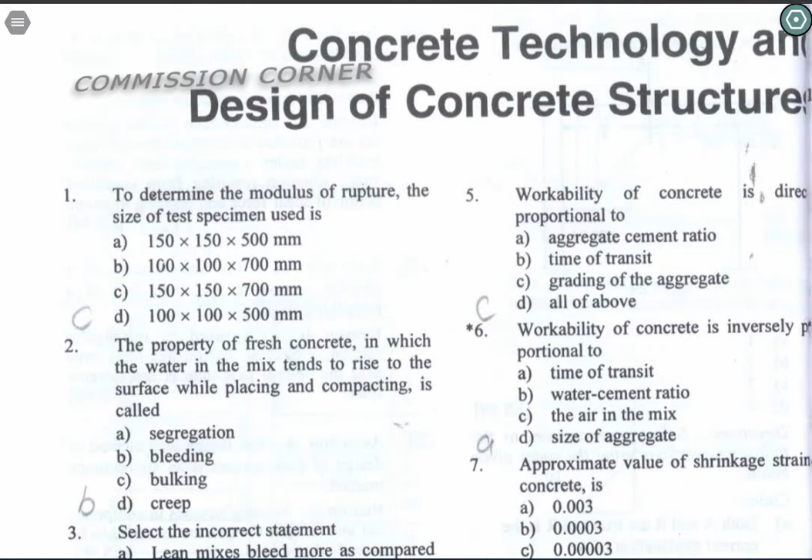Question number 3: Select the incorrect statement. Lean mixes bleed more as compared to rich ones - correct. Bleeding can be minimized by adding pozzolana finer aggregate - correct. Bleeding can be increased by addition of calcium chloride - correct. So all these options are correct, meaning option D, none of the above, is the answer.

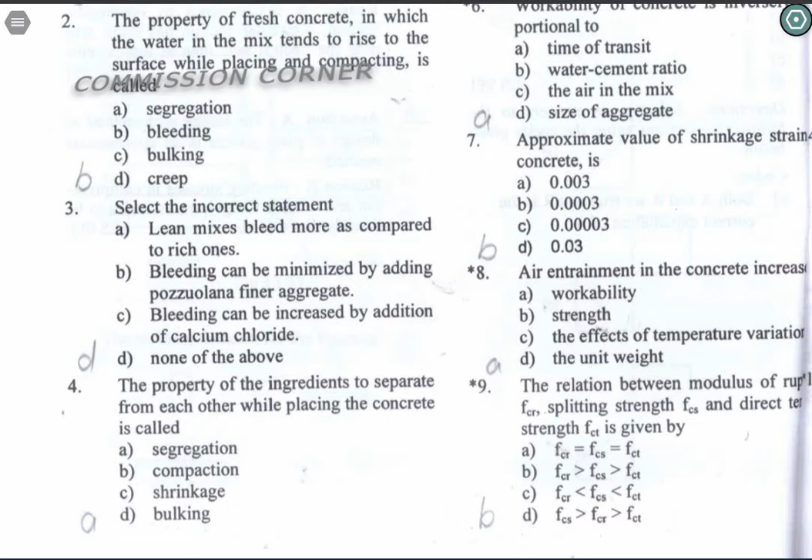Question number 4: The property of ingredients to separate from each other while placing the concrete is called segregation. Option number A is the correct answer for this.

Question number 5: Workability of concrete is directly proportional to the grading of aggregate. Option number C is the correct answer.

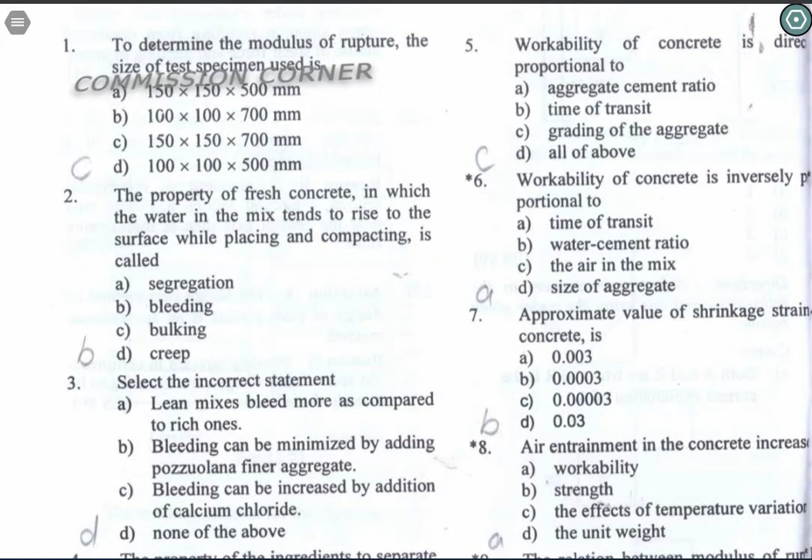Question number 6: Workability of concrete is inversely proportional to the time of transit. Option number A is the correct answer.

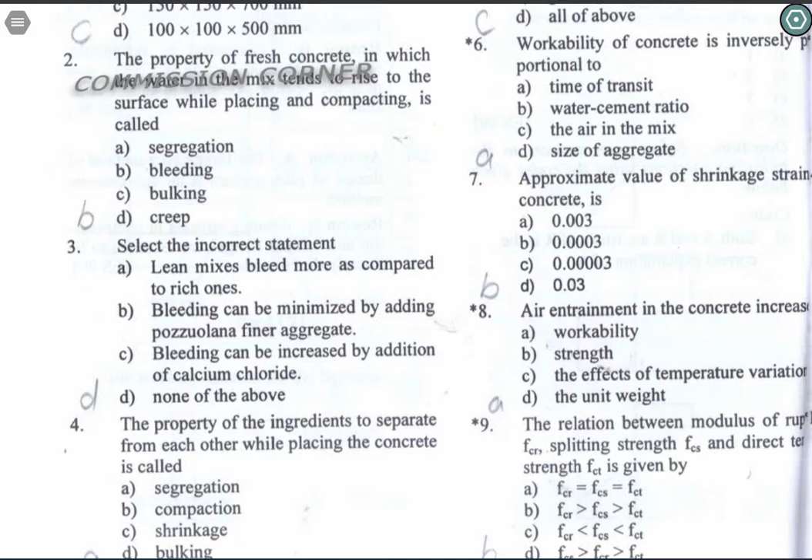Question number 7: Approximate value of shrinkage strain of concrete is 0.0003. Option number B is the correct answer.

Question number 8: Air entrainment in the concrete increases workability. Option number A will be the correct answer.

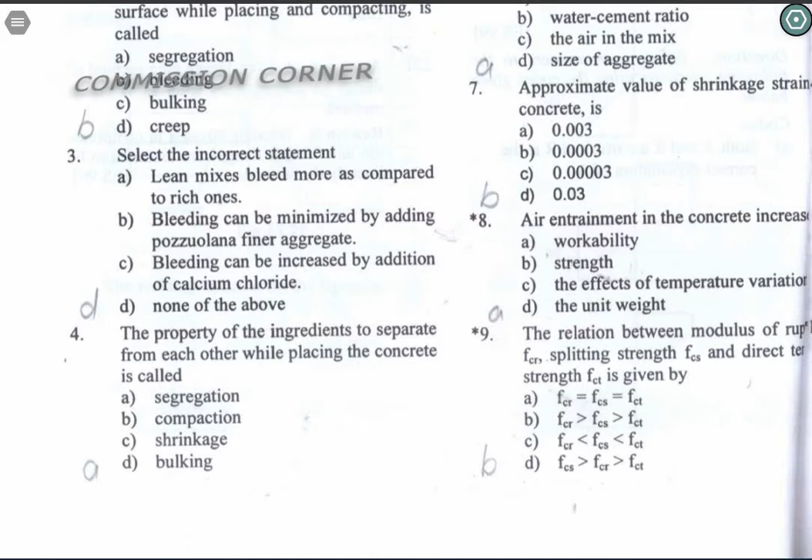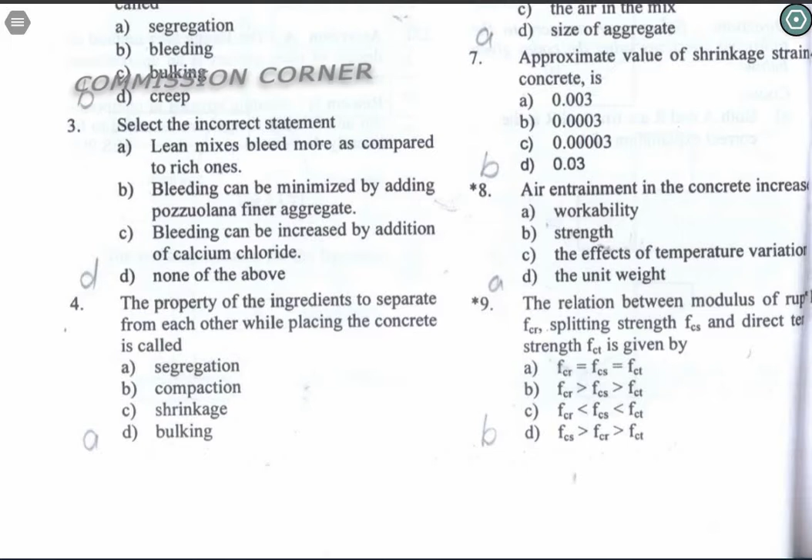Question number 9: The relation between modulus of rupture FCR, splitting strength FCS and direct tensile strength FCT is given by option number B, where first is modulus of rupture, second is splitting strength, and third is direct tensile strength.

Question number 10: The approximate value of ratio between direct tensile strength and flexural strength is option number B, 0.5.

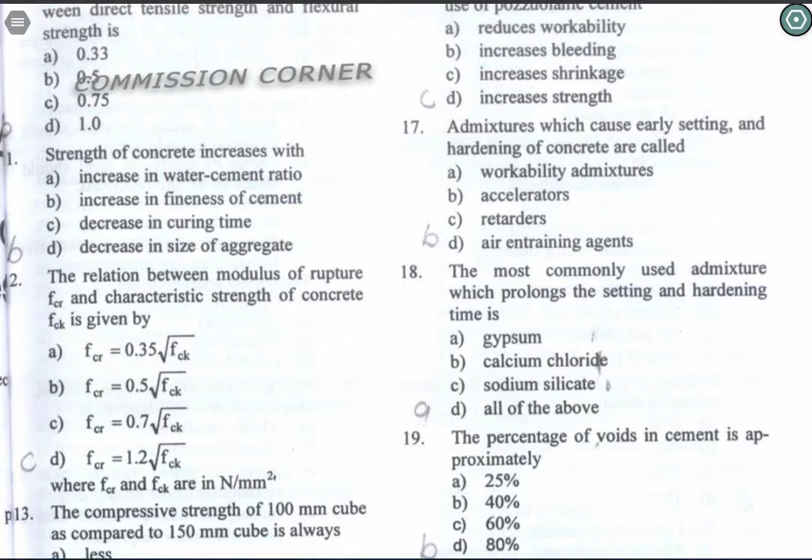Question number 13: The compressive strength of a 100 mm cube as compared to a 150 mm cube is always option B, more.

Compressive strength of your 100 mm cube will be higher as compared to a 150 mm cube.

Next question number 14. According to IS 456/1978, the modulus of elasticity EC can be taken as EC equals 5700 root FCK. Option A is the correct answer.

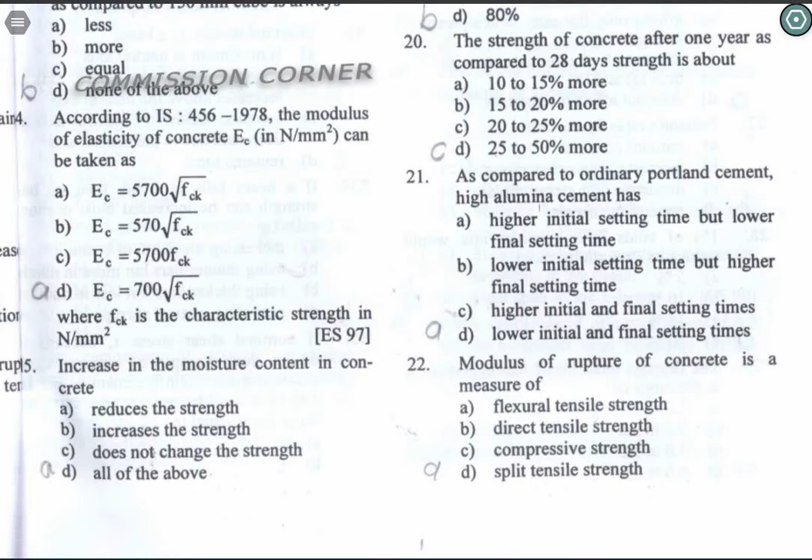Next question number 16. As compared to Portland cement, the use of pozzolanic cement increases the shrinkage. Option C is the correct answer.

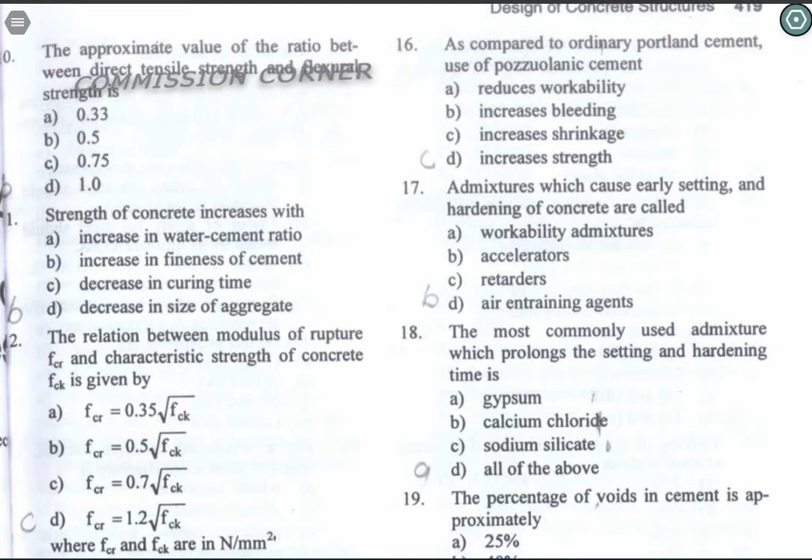Next question: admixture which causes early setting and hardening of concrete is called accelerator. For quick setting and hardening, we use accelerator. Option B is the correct answer.

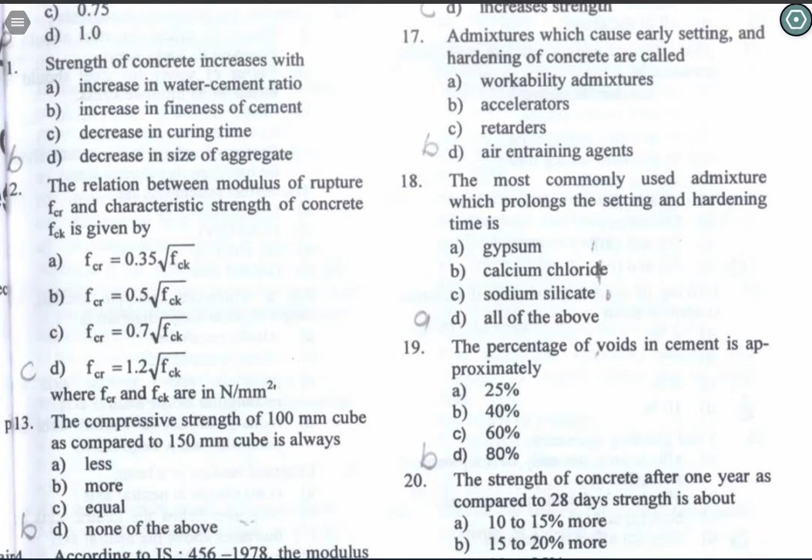Next question number 19. The percentage of voids in cement is approximately 40%. Option B is the correct answer.

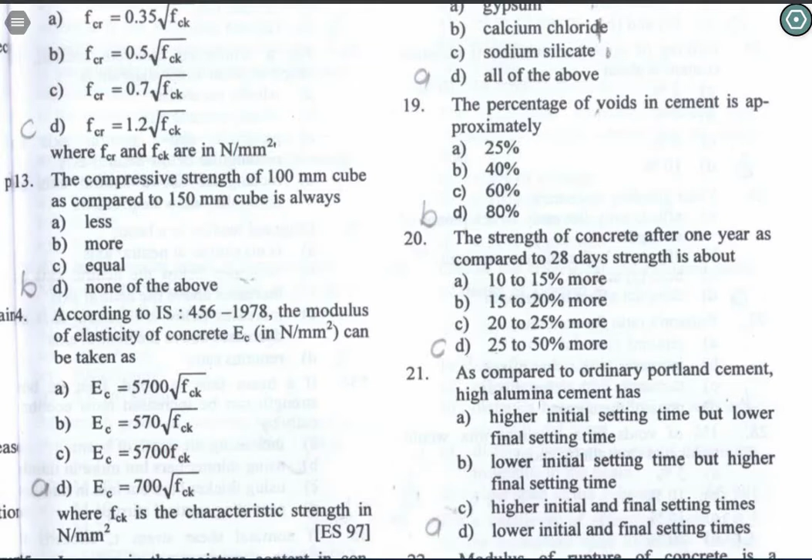Next question number 20. The strength of concrete after 1 year as compared to 28 days increases by about 20 to 25% in one year. So option C is the correct answer.

Next question number 21. As compared to ordinary Portland cement, high alumina cement has higher initial setting time but lower final setting time.

Next question number 22. Modulus of rupture of concrete is a measure of flexural tensile strength. Option A is the correct answer.

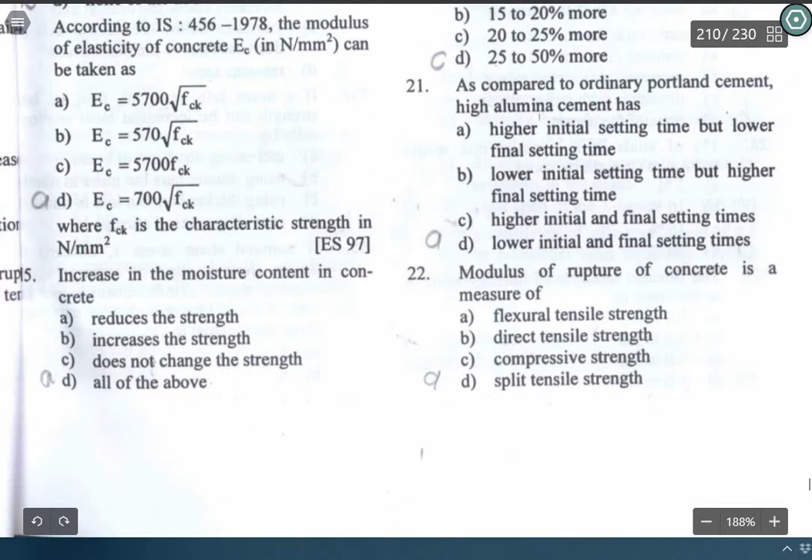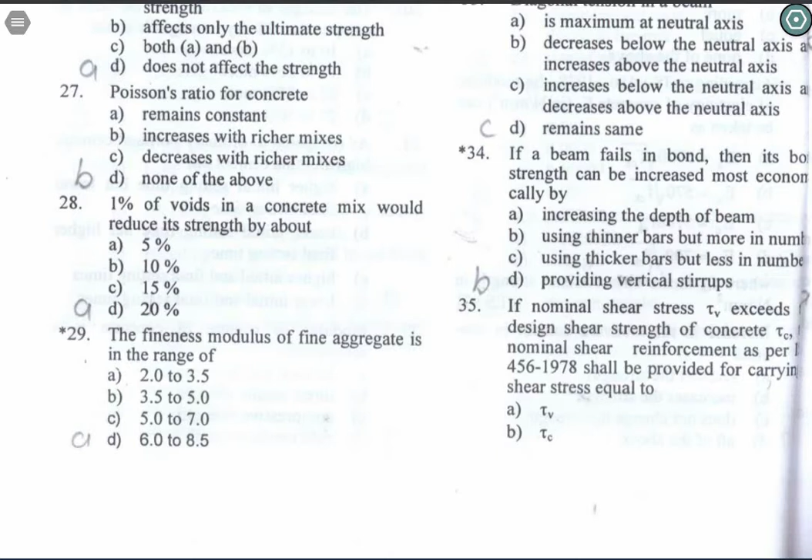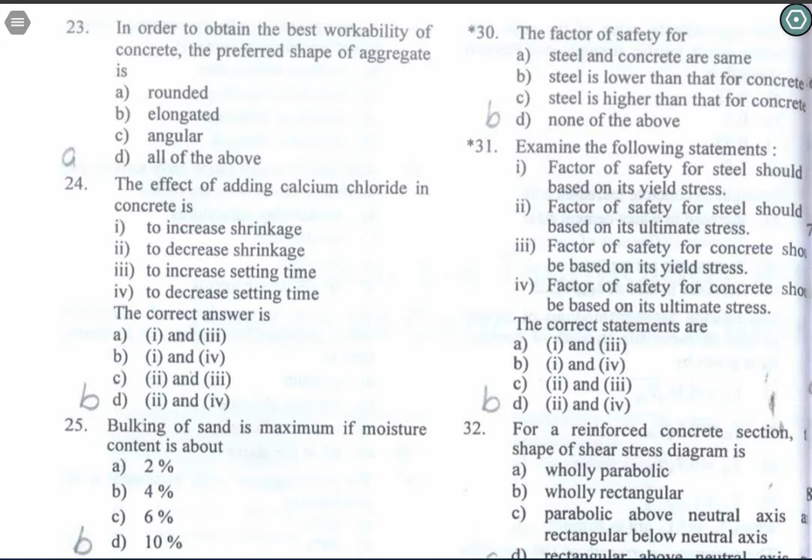Next question number 31. Examine the following statement: factor of safety of steel should be based on yield strength, and factor of safety of concrete should be based on ultimate stress. First and fourth statements are correct, so option B is the answer for question 31.

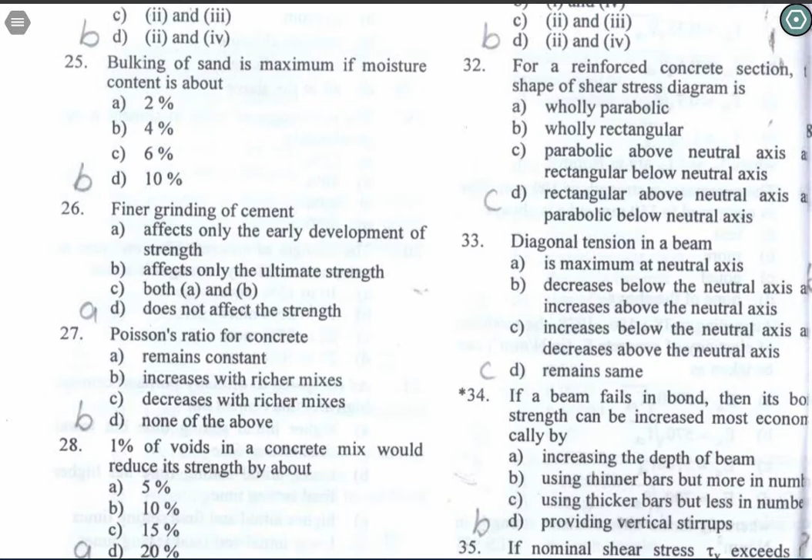Next question number 32. For a reinforced concrete section, the shape of the shear stress diagram is parabolic above the neutral axis and rectangular below the neutral axis. Option C is the correct answer.

Next question number 33. Diagonal tension in a beam increases below the neutral axis and decreases above the neutral axis. So option C is the correct answer for question number 33.

Next question number 34. If a beam fails in bond, then its bond strength can be increased most economically by using thinner bars in greater numbers. Option B is the correct answer.

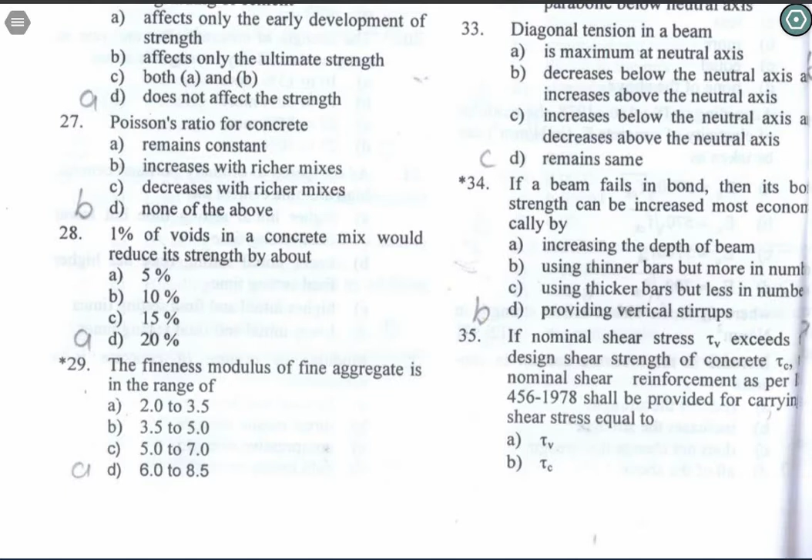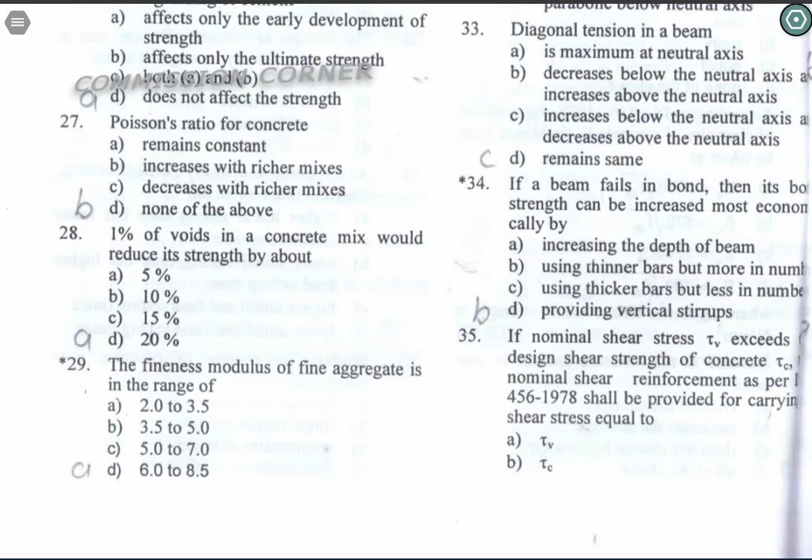Next question number 35: if nominal shear stress tau v exceeds design shear strength tau c, the nominal shear reinforcement as per IS 456:1978 shall be provided for carrying shear stress equal to tau v minus tau c. Option number C will be the correct answer for this, tau v minus tau c.

Next question number 36: if the depth of neutral axis in a beam is more than the depth of critical neutral axis, then the beam is called over reinforced beam. Next question number 37: if the depth of neutral axis for a singly reinforced rectangular section is represented by KD in working stress design, then the value of K for balanced section depends on sigma st only. Option number A is the correct answer.

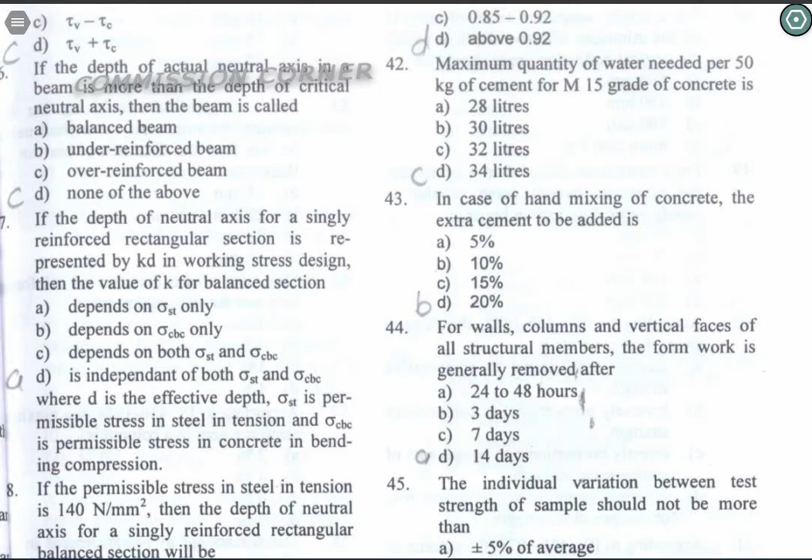Next question number 38: if the permissible stress in steel tension is 140 Newton per mm square, then the depth of neutral axis for a singly reinforced rectangular balanced section will be option number B, 0.40D. So yeah, question number 38, option B is the correct answer.

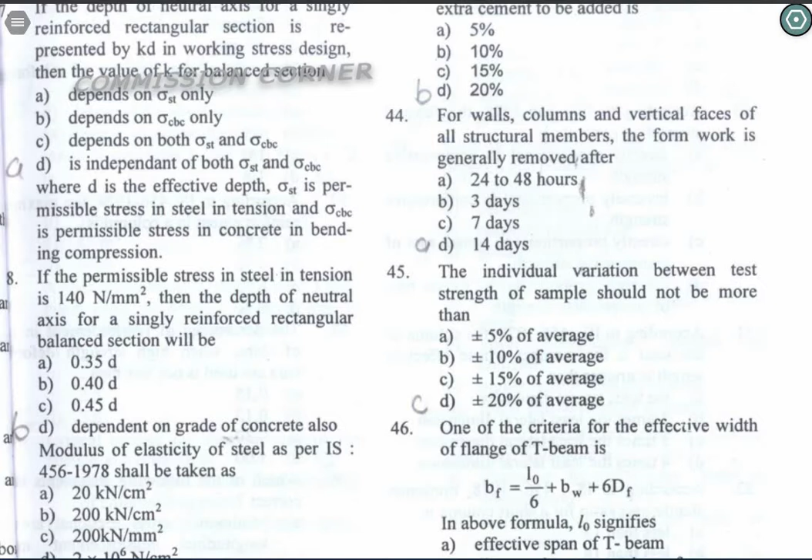Next question number 39: modulus of elasticity of steel as per IS 456 should be taken as option number C, 200 kilonewton per mm square. And in Newton per mm square it will be taken as 2 into 10 raised to power 5. Next question: minimum grade of concrete to be used in reinforced concrete as per IS 456 is M20. B is the correct answer.

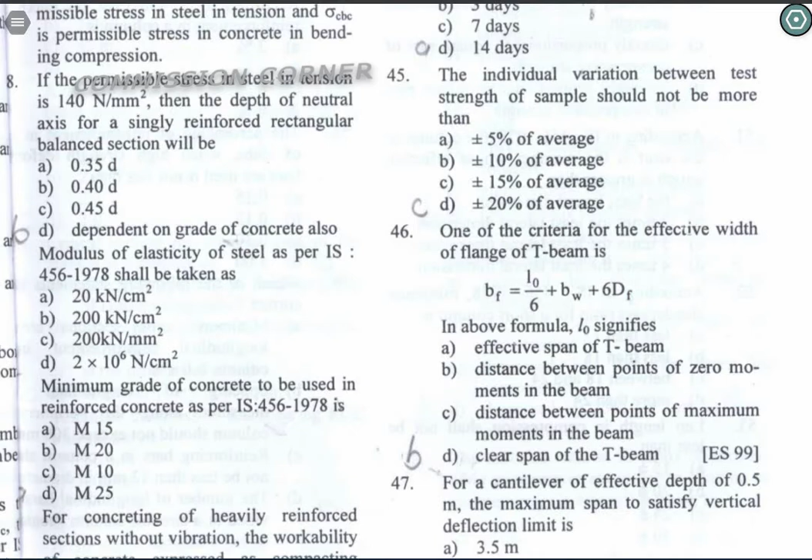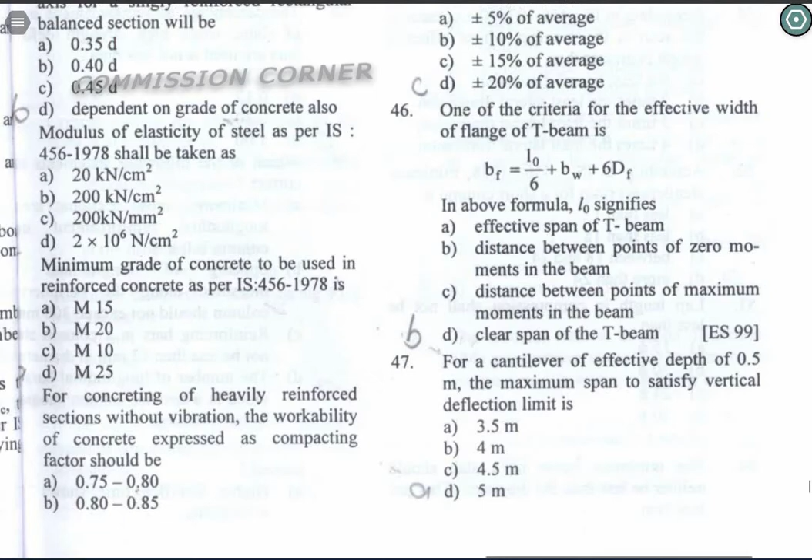Next question: for concreting of heavily reinforced section without vibration, the workability of concrete expressed as compacting factor is above 0.92. Option number D is the correct answer for this. Next question number 42: maximum quantity of water needed per 50 kg of cement for M15 grade of concrete is 32 liters. Option number C is the correct answer.

Next question number 43: in case of hand mixing of concrete, the extra cement to be added is 10%.

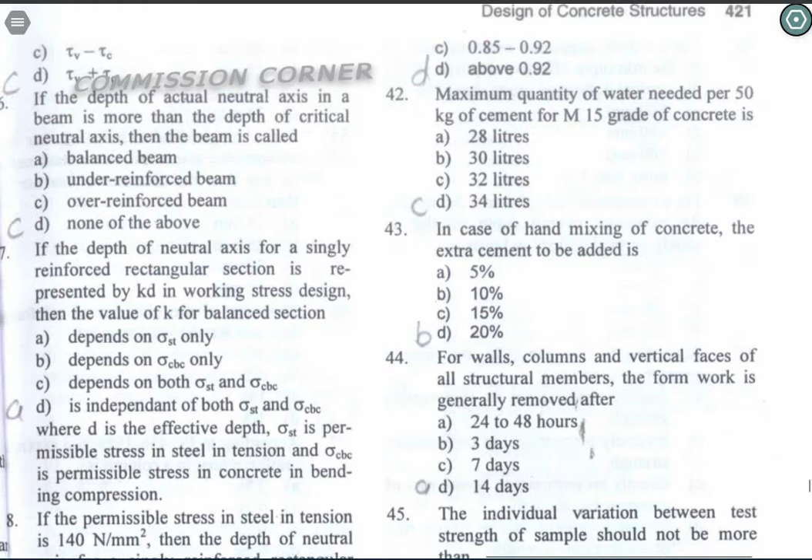Next question: for wall, column and vertical faces of all structural members, the form work is generally removed after 24 to 48 hours.

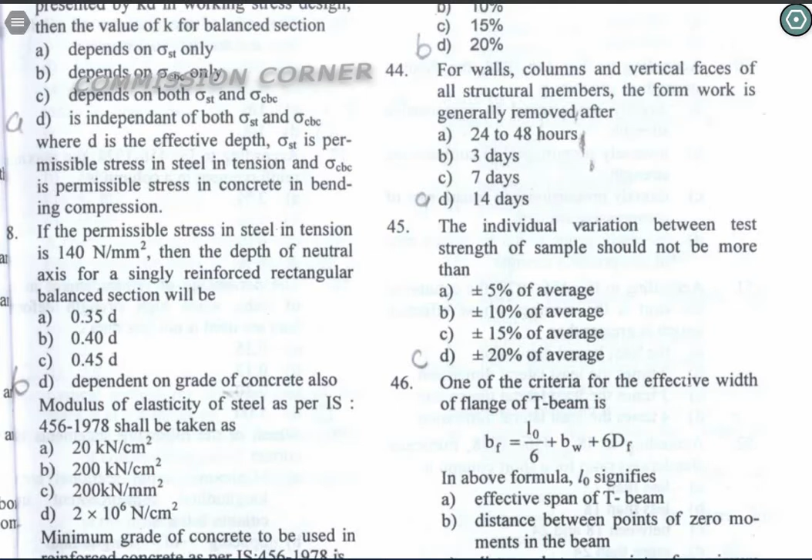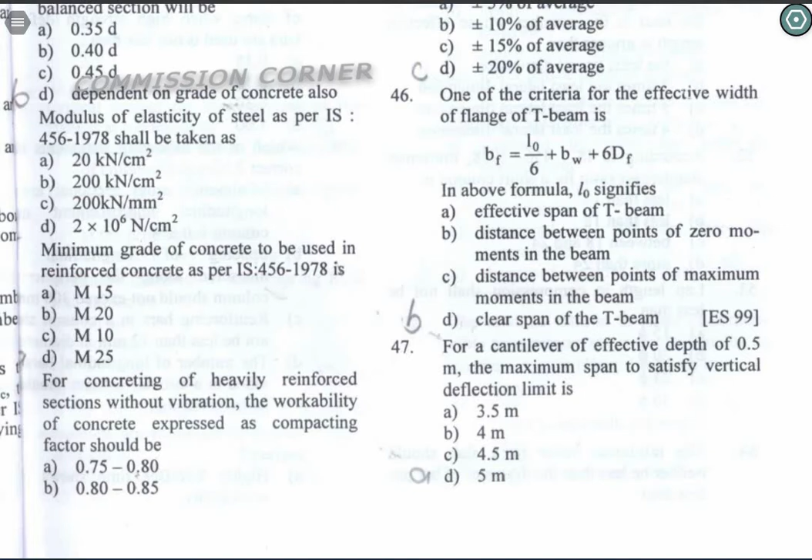...plus minus 15% of the average. C is the correct answer. Next question number 46: the criteria for the effective width of flange of T beam is BF equal to L naught upon 6 plus BW plus 6DF. In this formula, L naught signifies the distance between points of zero moments in the beam. Option number B is the correct answer.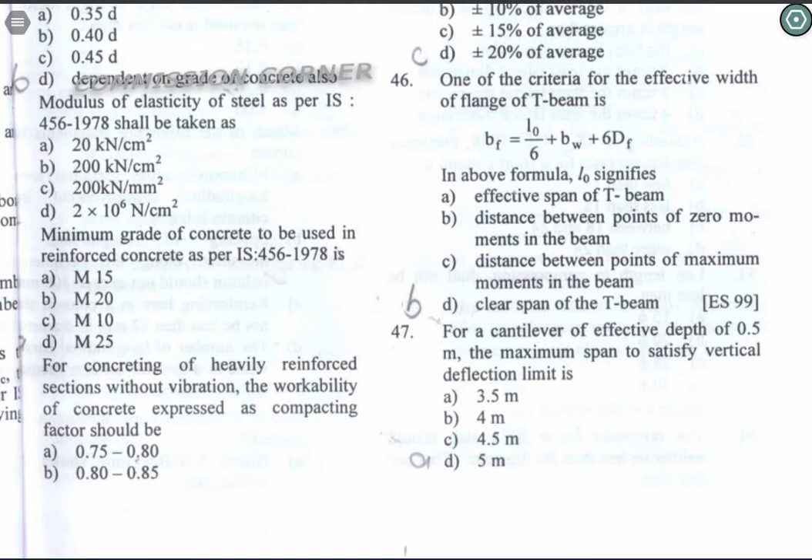Next question number 47: for a cantilever of effective depth 0.5 meter, the maximum span to satisfy vertical deflection limit is 3.5 meter. A is the correct answer. Next question number 48: for a simply supported beam of span 15 meter, the minimum effective depth to satisfy the vertical deflection is 750 mm. Option number B is the correct answer.

Next question number 49: for a continuous slab of 3 meter into 3.5 meter size, the minimum overall depth of slab to satisfy vertical deflection limits is 75 mm. Option number B is the correct answer. Next question number 50: according to IS 456:1978, the flexural strength is directly proportional to the square root of compressive strength. Option number C is the correct answer.

Next question number 51: according to IS 456:1978, the column or strut is a member whose effective length is greater than 3 times the least lateral dimension. C is the correct answer. Next question number 52: according to IS 456, the slenderness ratio for short column is less than 12.

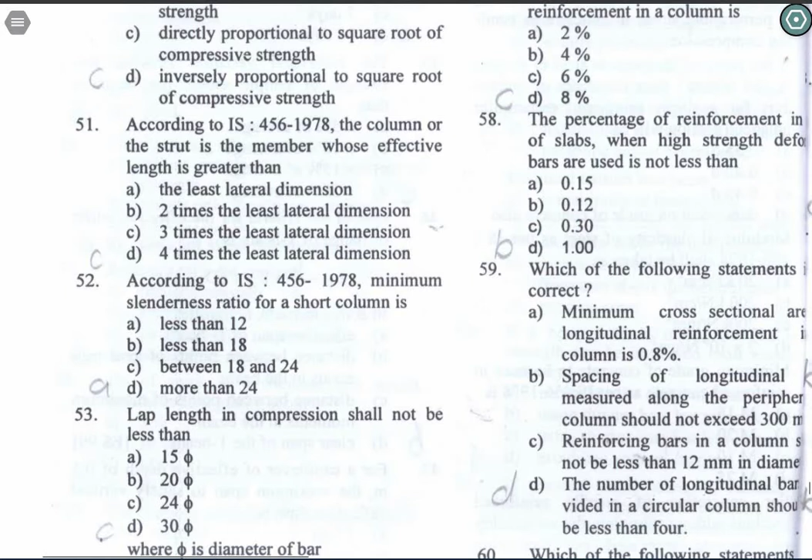Phi is the diameter of bar.

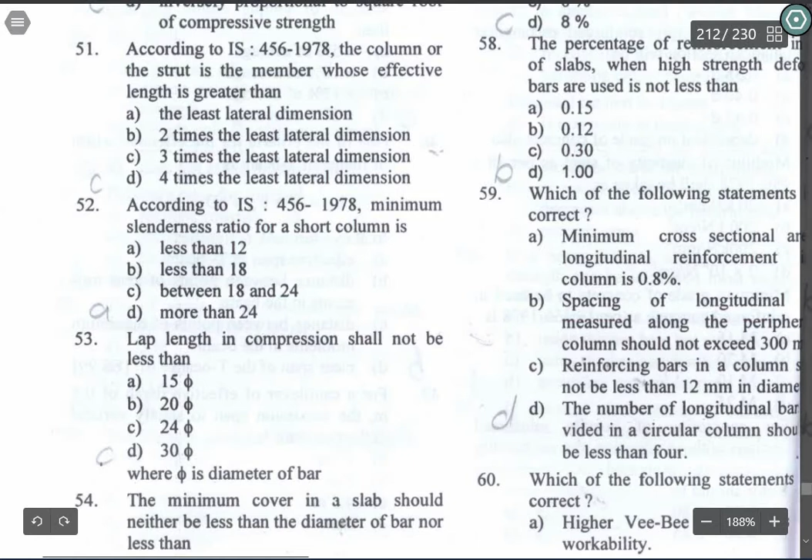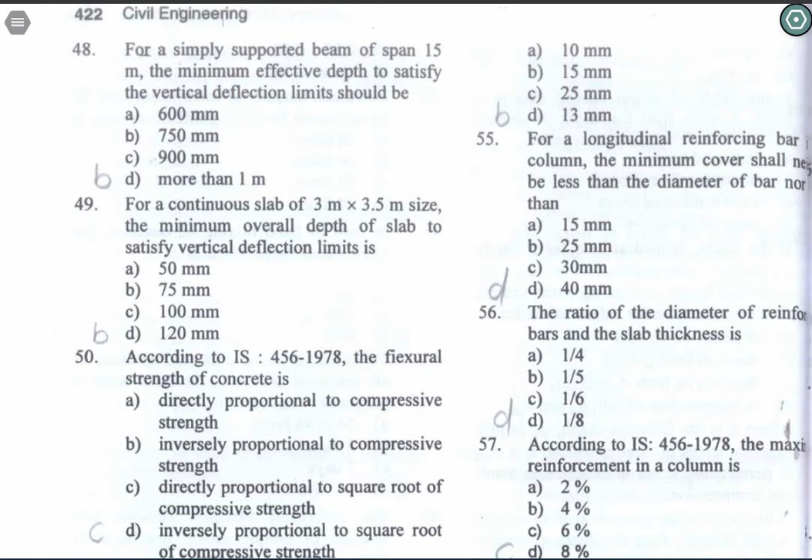Next, question number 54. Minimum cover in a slab should neither be less than the diameter of bar nor less than 15 mm. Next, question number 55. For a longitudinal reinforcing bar in a column, the minimum cover shall neither be less than the diameter of bar nor less than 40 mm. Option number D is the correct answer.

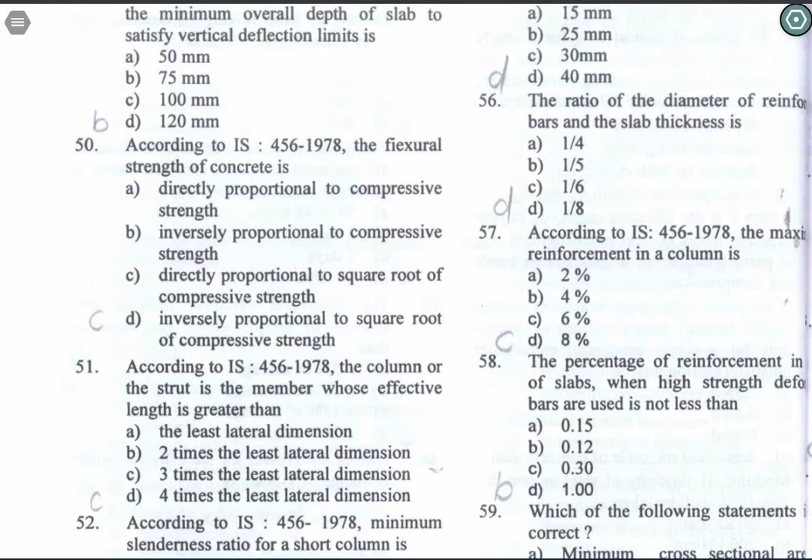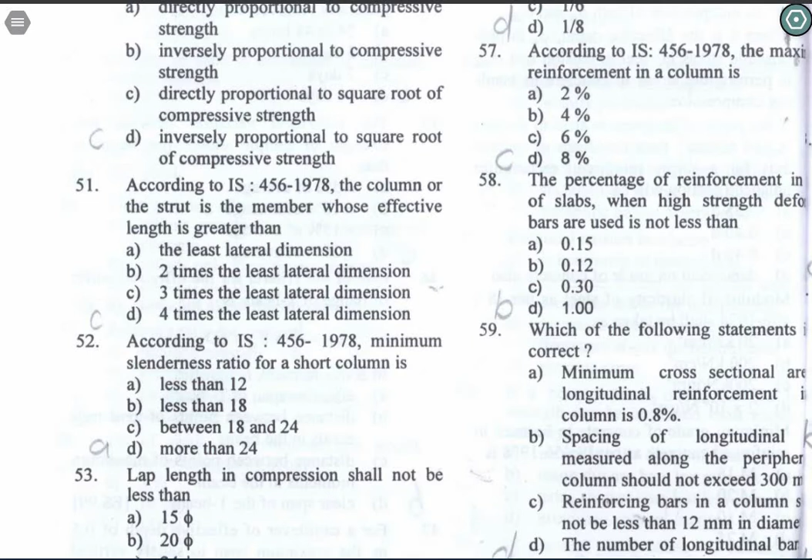Next, question number 56. The ratio of diameter of reinforcing bar and the slab thickness is 1/8. Option number D is the correct answer. Next, question number 57. According to IS 456, the maximum reinforcement in a column is 6%. Next, question number 58. The percentage of reinforcement in slab where high strength deformed bars are used is not less than 0.12. B is the correct answer.

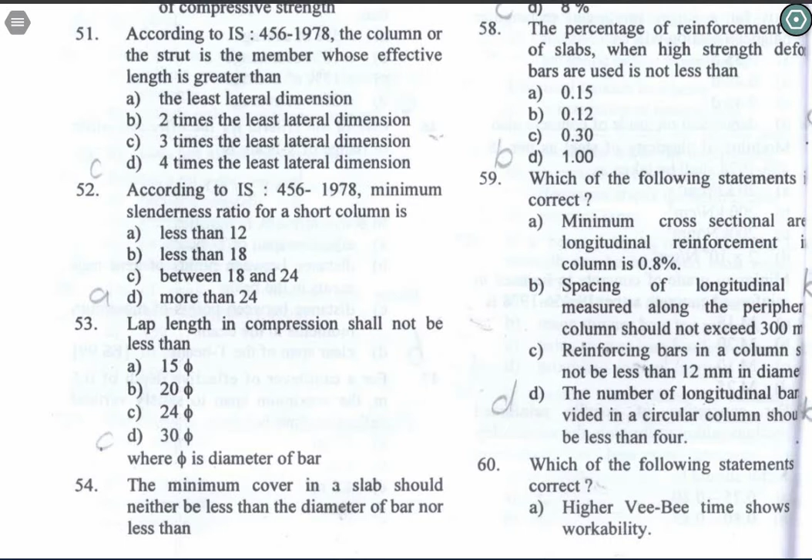Next, question number 59. Which of the following statements is correct? The number of longitudinal bars provided in a circular column should not be less than 4. Next, question number 60. Which of the following statements are correct? Higher Vee-Bee time shows workability. Higher slump shows higher workability. Higher compacting factor shows higher workability, and none of the above. So option number D is the correct answer for this. None of the above.

Next, question number 61. Minimum pitch of transverse reinforcement in a column is the lesser of the above three values. That means the least lateral dimension of the member, 16 times the smaller diameter of longitudinal reinforcement bar to be tied, 48 times the diameter of transverse reinforcement.

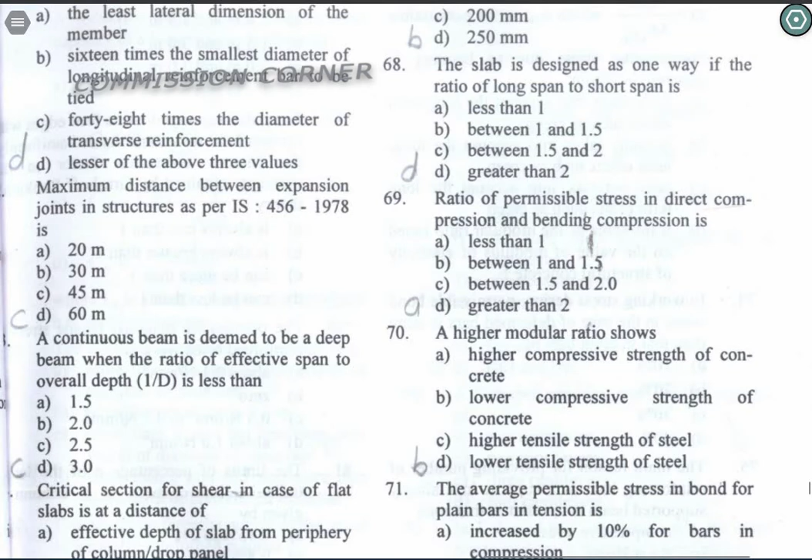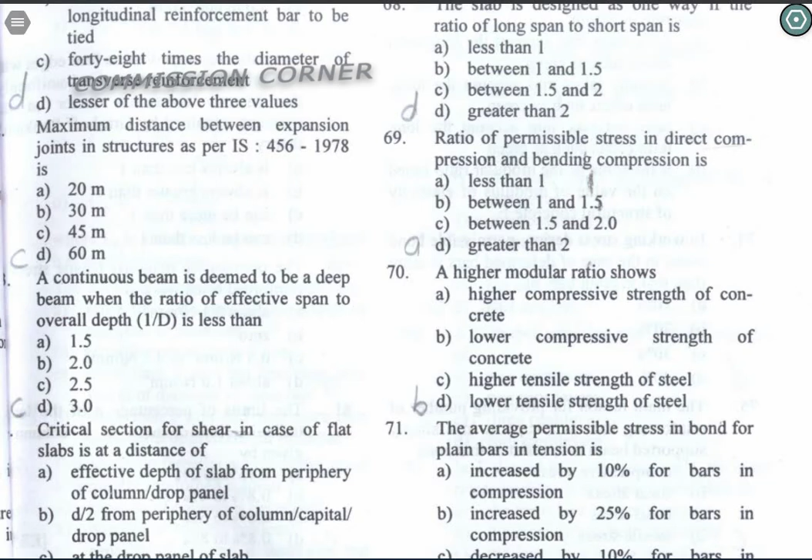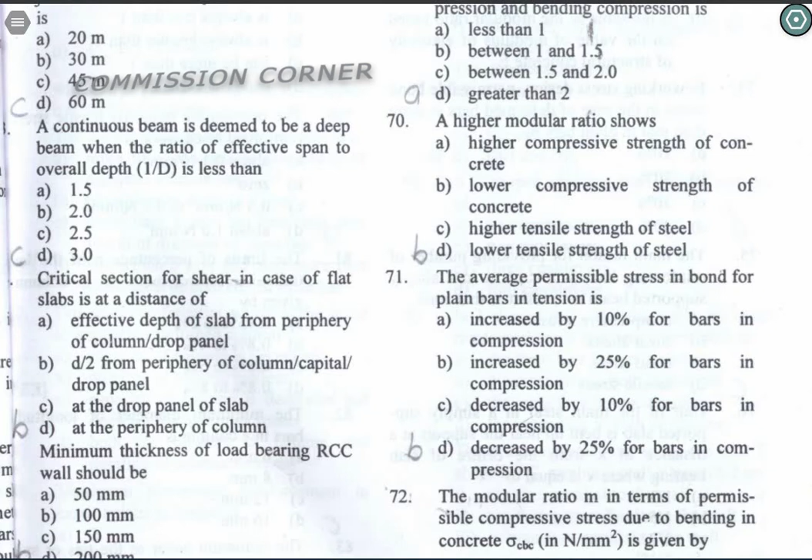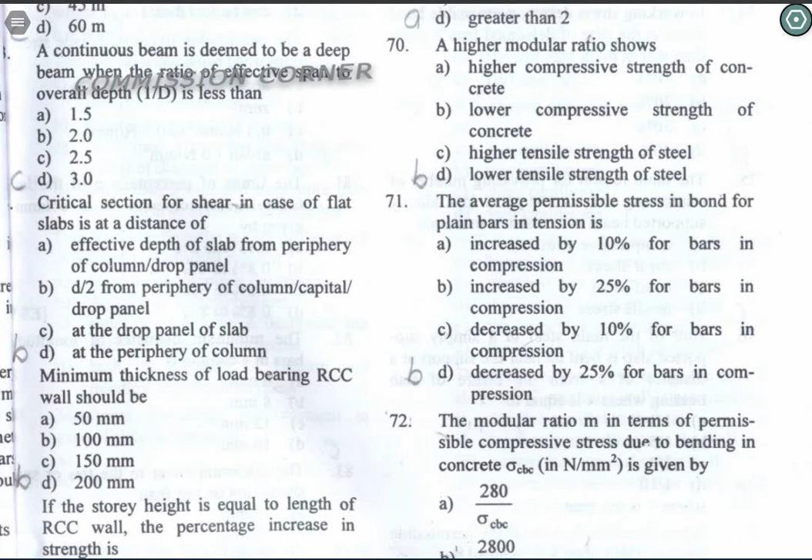Next question. A continuous beam is deemed to be a deep beam when the ratio of effective span to overall depth is less than 2.5. Next question. Critical section for shear in case of flat slab is at a distance of effective depth/2 from the periphery of column, capital and drop panel. Option number B is the correct answer. Next question. Minimum thickness of load bearing RCC wall should be 100 mm. Option number B is the correct answer.

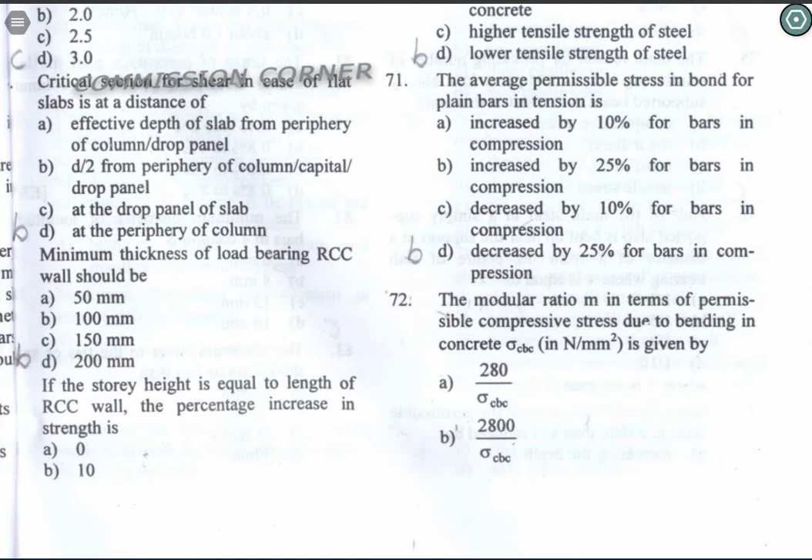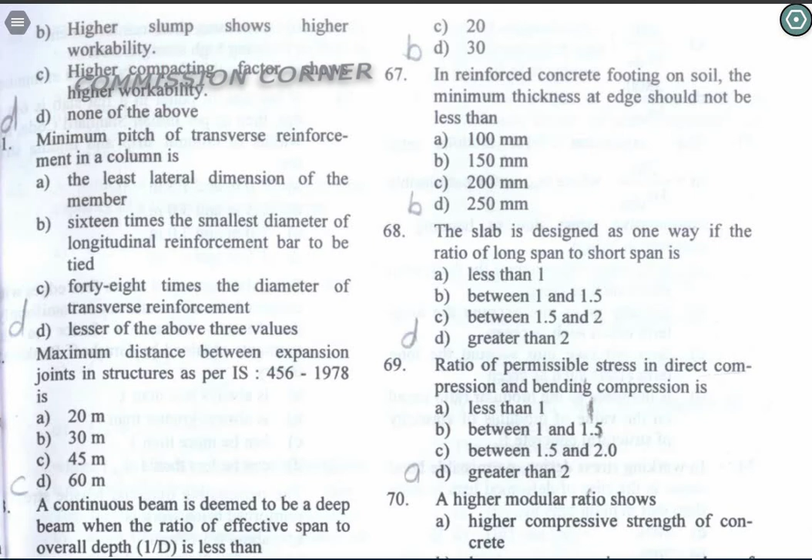If the story height is equal to the length of the RCC wall, the percentage increase in strength is 10. B is the correct answer. Next, question number 67. In a reinforced concrete footing on soil, the minimum thickness at edge should not be less than 150 mm. B is the correct answer. Next, question number 68. The slab is designed as one way if the ratio of long span to short span

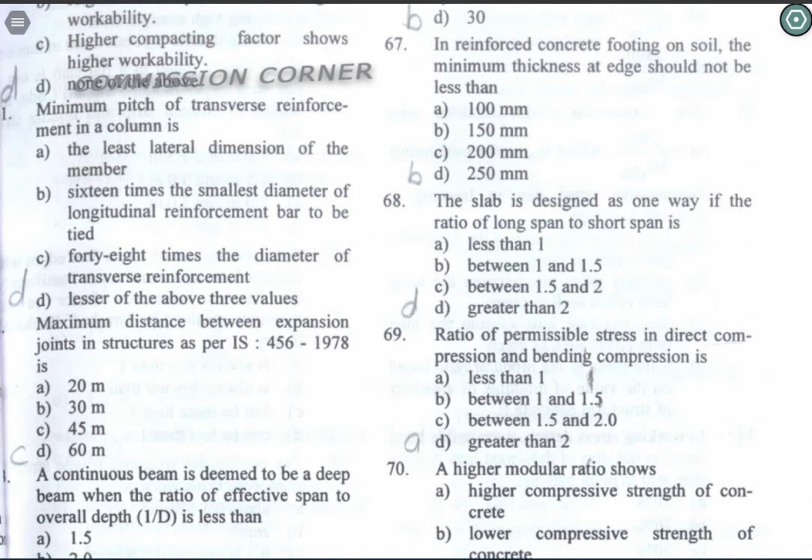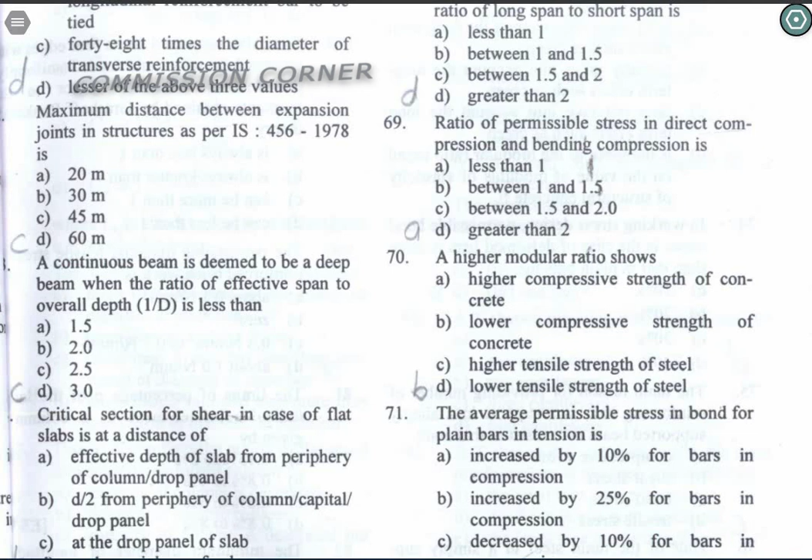A is the correct answer. Next, question number 70. A higher modular ratio shows lower compressive strength of concrete.

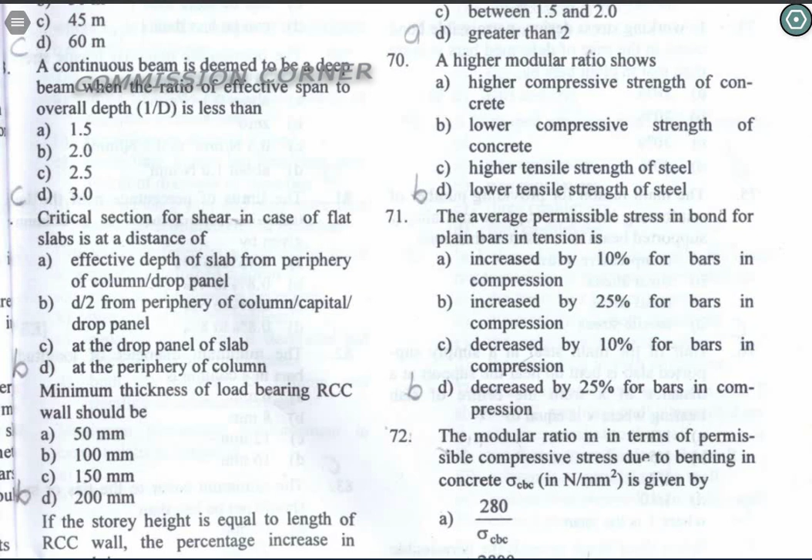B is the correct answer. Next, question number 71. The average permissible stress in bond for plain bars in tension is increased by 25% for bars in compression. B is the correct answer. Next, question number 72. Last question for this session, guys.

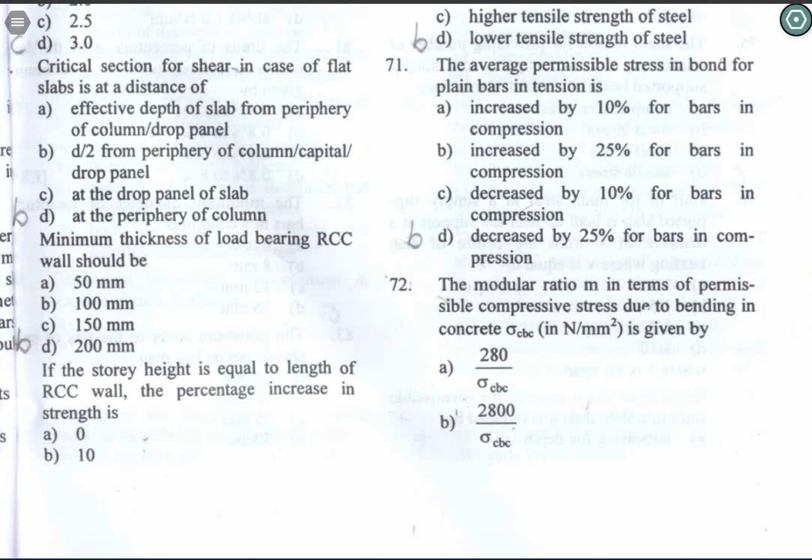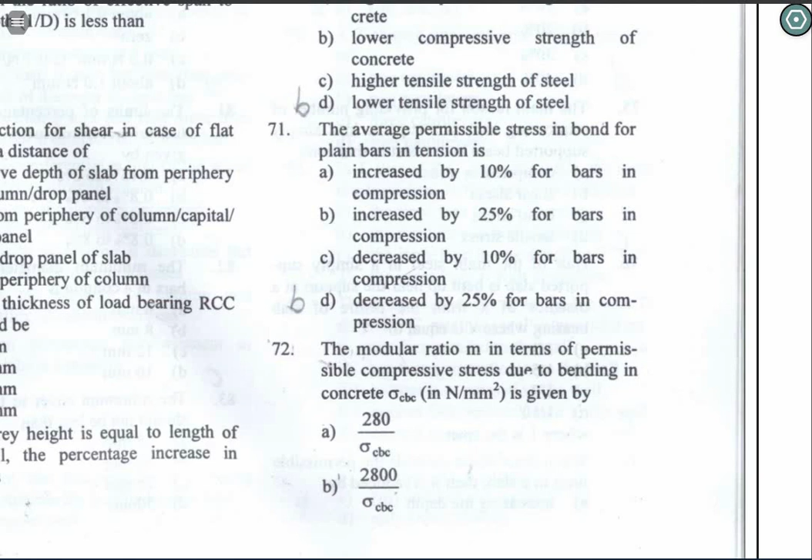280 upon 3 sigma CBC.